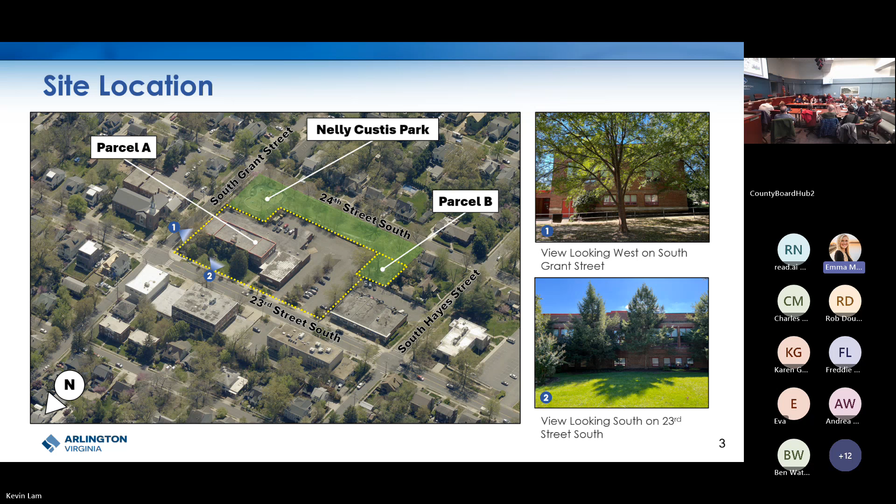It consists of two parcels. The first, parcel A, is currently occupied by Melwood, housed in the former Nelly Custis School building, as well as its associated surface parking area. Parcel B consists of a portion of Nelly Custis Park. Although the applicant owns parcel B, it has a public park and open space easement over it, and the applicant is not proposing any improvements to this parcel.

The applicant is requesting a rezoning to RA 8-18, multiple family dwelling district, for the entire site. They are also requesting a GLUP change to low-medium residential for parcel A only, while parcel B remains public GLUP designation.

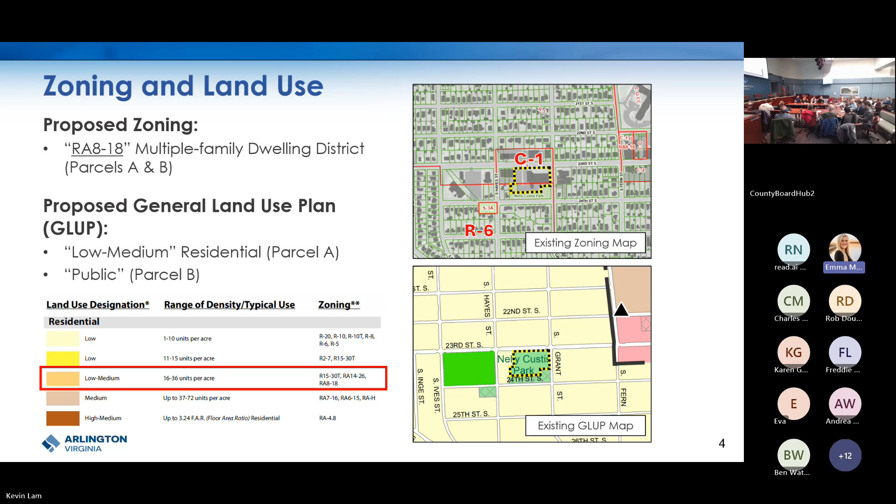In terms of policy guidance, we can again look to the Melwood GLUP study document, which provides specific guidance for redevelopment pursuant to various topics. Pertinent to tonight's discussion, topics will mainly focus on the transportation and environment recommendations.

Under transportation, recommendations include improving sidewalks and streetscapes to meet county standards, considering upgrading nearby crosswalks and bus stops, locating parking underground with parking and loading entrances appropriately screened, and conducting a multimodal traffic assessment to study potential traffic and parking impacts. In terms of the environment, encourage participation in the county's Green Building Incentive Program, prioritizing biophilia, sustainability, and meeting a tree canopy coverage goal of 25%.

To the extent possible, conserving existing mature trees, providing a vegetated green buffer with the park and adjacent properties, and finally employing best stormwater management practices.

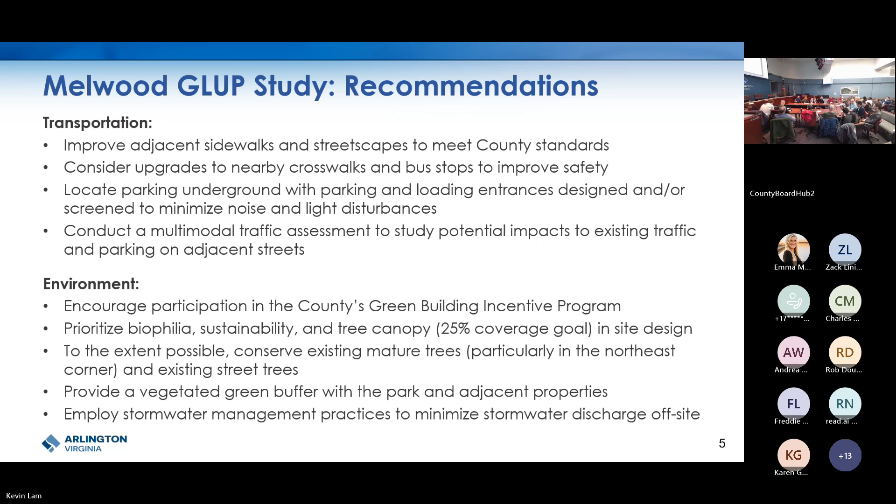With that in mind, launching into the topics for tonight, first up is project updates. I'll let the applicant go through these in more detail, but I wanted to highlight one main update: the main building entrance, shown by the red arrow, is now located where the historic interpretation of the school facade is. This also results in the ground floor uses being flipped, so the Melwood space is now on the western side of the ground floor.

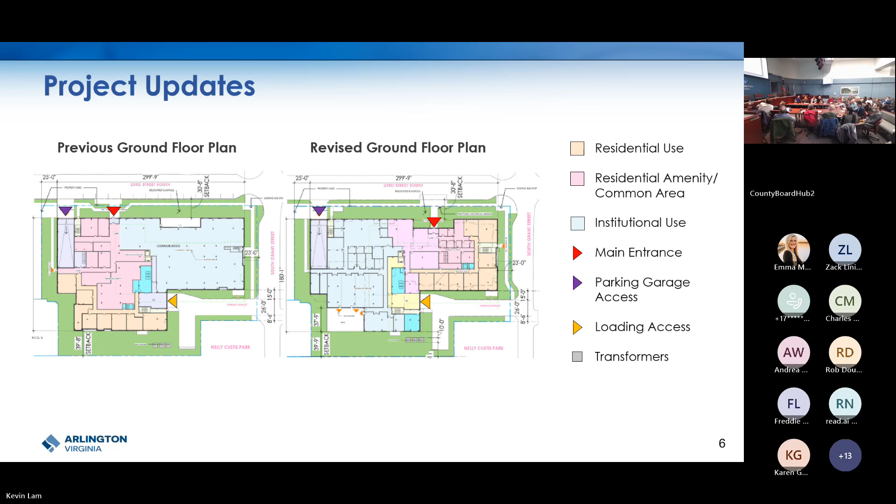All right, so Bryce, you can just hand me that. Oh, that works.

Again, my name is Bryce Johnson with the Department of Environmental Services. I'll cover the transportation section for this.

This location is served by a variety of transportation options, including bus stops spaced a block apart along 23rd Street South, nearby metro stations, and a bike share station on South Hayes Street to the west.

The MTP designates the adjacent segment of 23rd Street South as a Type E arterial road, planned to contain 2 to 4 travel lanes, no restrictions on driveway access, medium on-street parking priority, a 4 to 6 foot wide landscape strip, and a 5 to 6 foot wide sidewalk.

The MTP designates the adjacent segment of South Grant Street as a neighborhood local street, planned to contain either a yield street condition or 2 travel lanes, no restrictions on driveway access, a 2 to 4 foot wide landscape strip, and a 4 to 6 foot wide sidewalk.

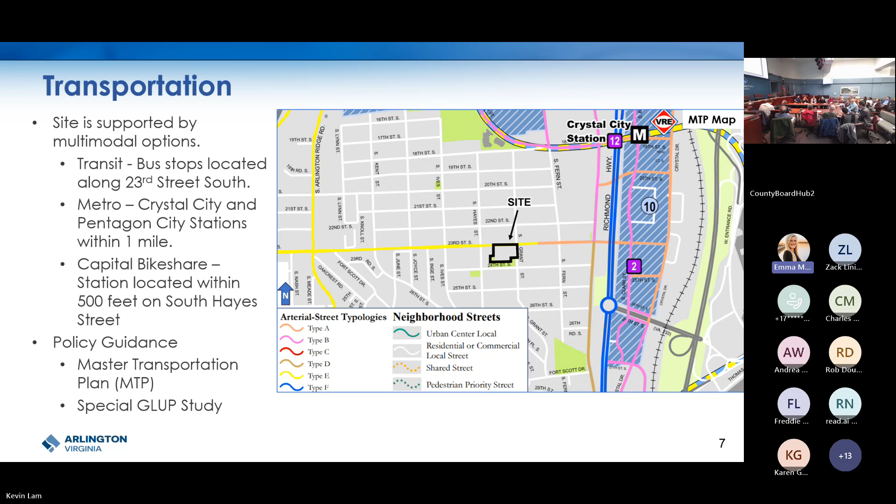Here are the proposed site conditions, showing again what Kevin was just showing, but this time focusing on site access. The applicant proposes to utilize an existing driveway entrance on 23rd Street South for the proposed underground garage entrance.

For loading and trash, the applicant proposes a separate entrance from South Grant Street, shown in orangish yellow on the screen. For bicycle parking, the applicant proposes 2 bicycle storage rooms, one located in the underground garage and one located on the ground floor with access from 23rd Street South.

Based on prior feedback from Metro regarding the 2025 Better Bus Network, the current plans show the removal of an existing Metro bus stop at the intersection of 23rd Street South and South Grant Street. However, the final approved bus network does show retention of that bus stop, so staff is coordinating with Metro and the applicant to ensure the plans are consistent with the new bus network launching in summer 2025.

If the bus stop were to be removed, the site would retain access to nearby bus stops located within a 3-minute walk to the east and west.

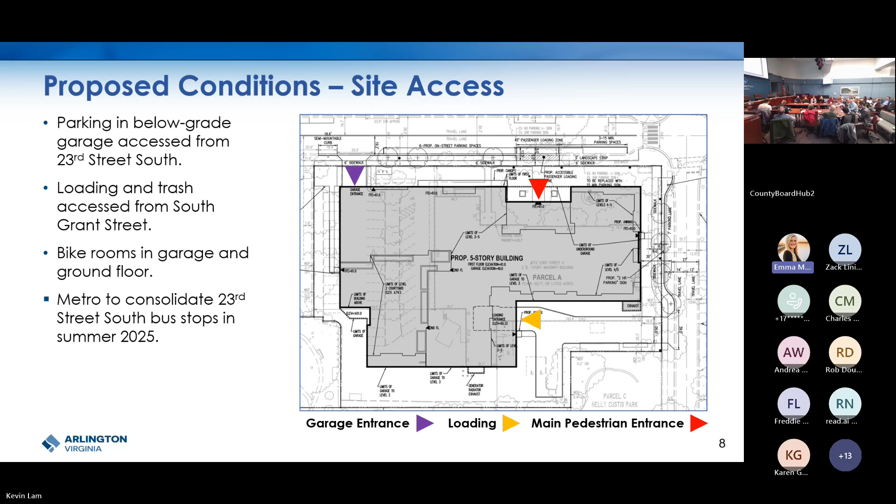Here we'll move on to parking and loading. The applicant proposes a total of 93 parking spaces with the submission submitted earlier this month. This includes 73 residential parking spaces and 20 parking spaces for Melwood. The applicant is requesting a reduced residential parking ratio of about 0.69 spaces per unit.

The parking spaces are all located in the below grade parking level at the garage, accessed from 23rd Street South, as mentioned before. The building includes a single loading space accessed from South Grant Street, which will serve both residents and Melwood. The applicant also proposes a total of 53 bicycle spaces, including the 47 secure spaces mentioned before, as well as 6 street spaces located outside.

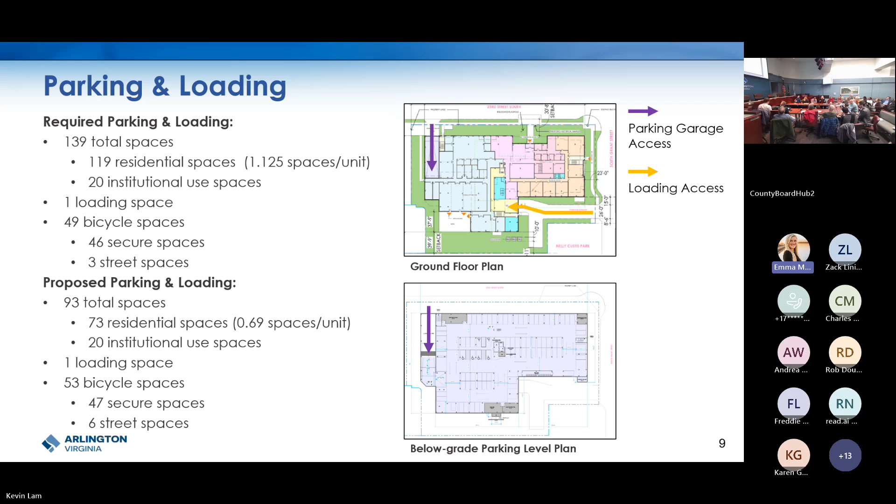On the street, the applicant proposes 3 additional parking spaces, a passenger loading zone, and 3 short-term parking spaces. The passenger loading zone would be located at the main building entrance, as Kevin mentioned before, with the short-term parking located to the right or east of that entrance.

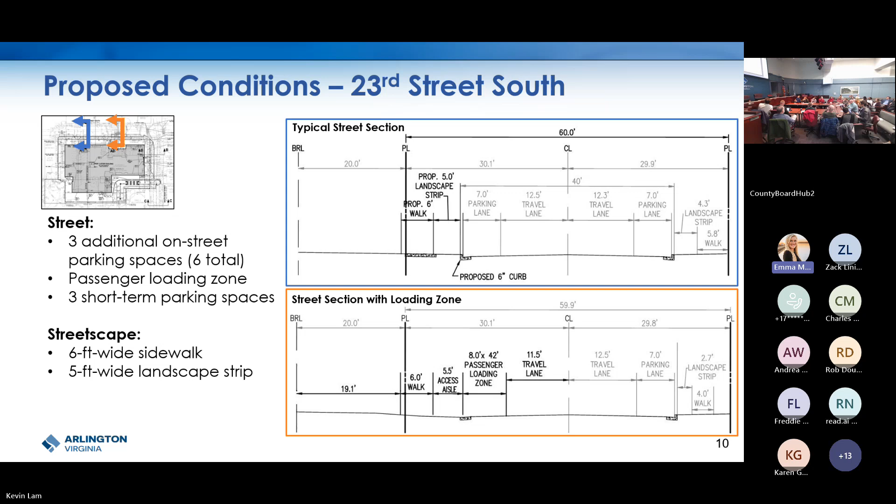Next, we'll move on to South Grant Street. This is again, in this instance, facing north. The applicant proposes to widen the majority of the site's frontage with South Grant Street in order to accommodate a required aerial access fire lane within the travelway.

This is a minimum 26 feet. This new street section will increase from being 24 feet wide total to 34 feet wide in total, including 2 travel lanes instead of a yield street condition, and remove the Sunday-only parking currently provided. On-street parking will, however, be provided along the property's frontage with a curb inset created by the street widening.

Moving on to open space and landscaping. Along the 23rd Street frontage, the applicant proposes new trees and landscaping within the building setback. The applicant also proposes a vegetated buffer with Nelly Custis Park to the south. Overall, around 47 trees are proposed to be removed and replaced per the county's tree replacement standards.

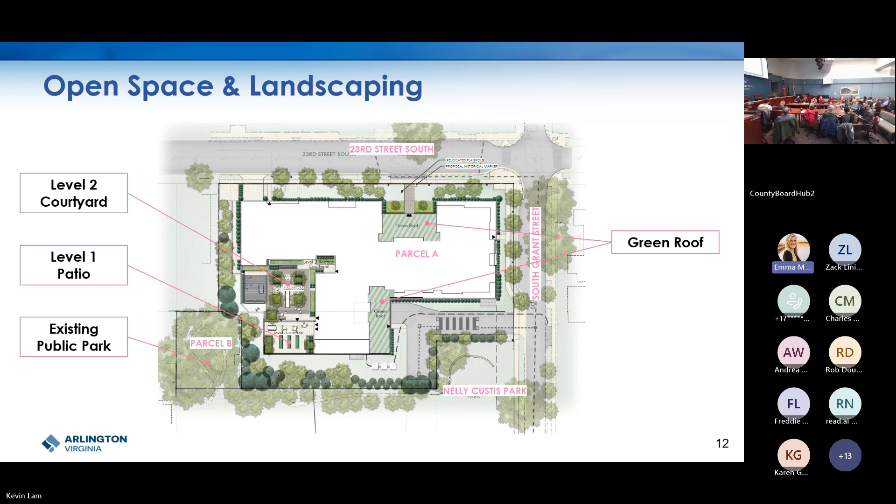There will be 63 new trees planted on parcel A for a tree canopy coverage of around 22% just on parcel A. There are also 8 trees being conserved on parcel B, which remains as part of Nelly Custis Park, and would bring the total tree canopy coverage for parcel A plus B to around 27%.

The applicant proposes to achieve a National Green Building Standard Silver certification, which is an eligible green building rating system per the state's affordable housing funding applications. This is in lieu of the LEED or EarthCraft multifamily rating systems we typically review at the county. While the applicant is not currently seeking additional density under the county's Green Building Incentive Program, they are pursuing additional certifications such as those listed here. Lastly, the project will be providing Energy Star appliances and WaterSense fixtures.

In terms of community engagement, staff held an online engagement opportunity, which garnered 219 participants and over 1,100 comments. In terms of tonight's SPRC discussion topics, the feedback was that many feel the proposal will significantly impact traffic and on-street parking availability on surrounding streets.

While some believe the amount of parking being provided is appropriate, given the proposed use and nearby transit options, many feel it is insufficient. Many also expressed strong dissatisfaction about the removal of existing trees and green space, especially in that northeast corner. And while some support the pursuit of NGBS Silver certification, others advocate for higher green building standards such as LEED Gold or higher.

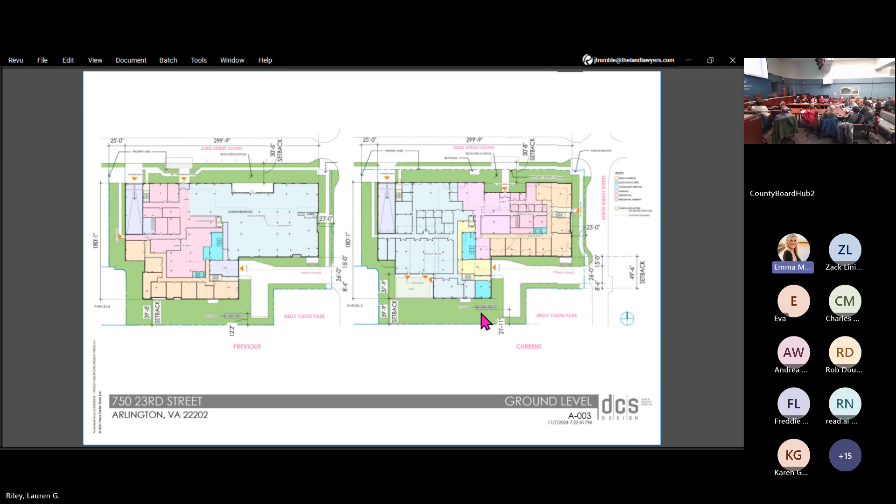The other thing you can see on this page is the prior location of those transformers, about 12 feet from the property line, are now almost 22 feet from the property line. We moved them as far back as we could while maintaining the requirements for distance from the building.

And then on the next page, this is a better exhibit to show you how that second floor has pushed back. It is pushed back an additional 37 feet 9 inches from the building front where it stood before. That provides additional relief in the massing, and additional relief in that courtyard not looking over the park directly. As I showed you on the previous page, we've added landscaping there.

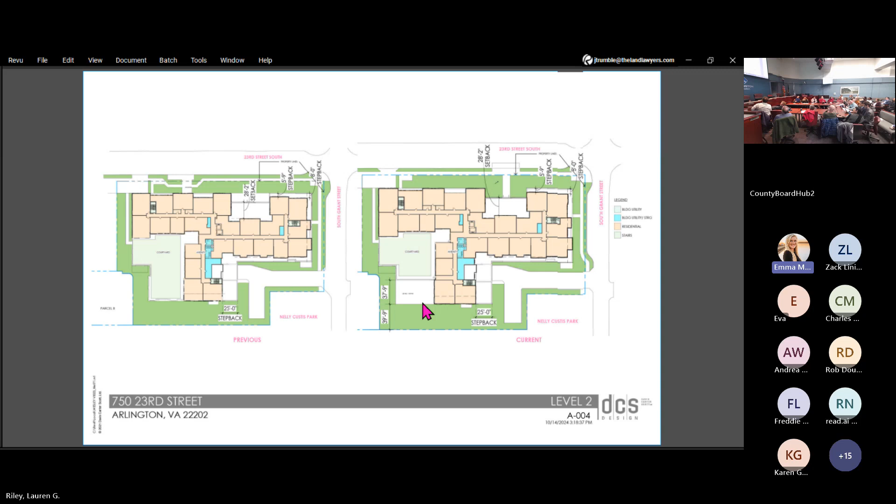I'm going to quickly turn it to Karen, who's going to talk about the streetscape.

The next slide, here is Grant Street. Again, what was discussed earlier today, it is a 17-foot wide yield street. Due to the fire marshal requirements, we are increasing that to 26 feet wide with a 7-foot parking lane now on the west side of the street.

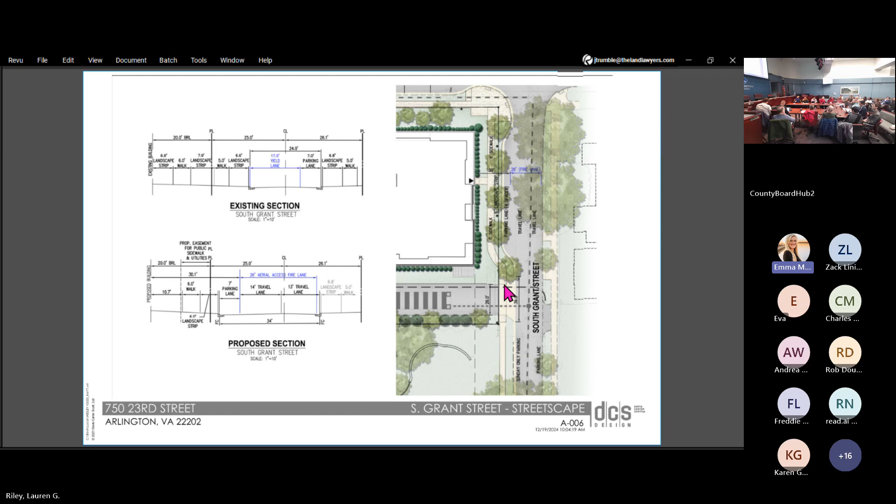Another comment we addressed was on the previous design, the transition to the existing curb was south of our driveway entrance along Grant, and now the bump-in is only between the corner and our entrance, then we shift back to meet existing, so there are no changes in front of the park along the street frontage.

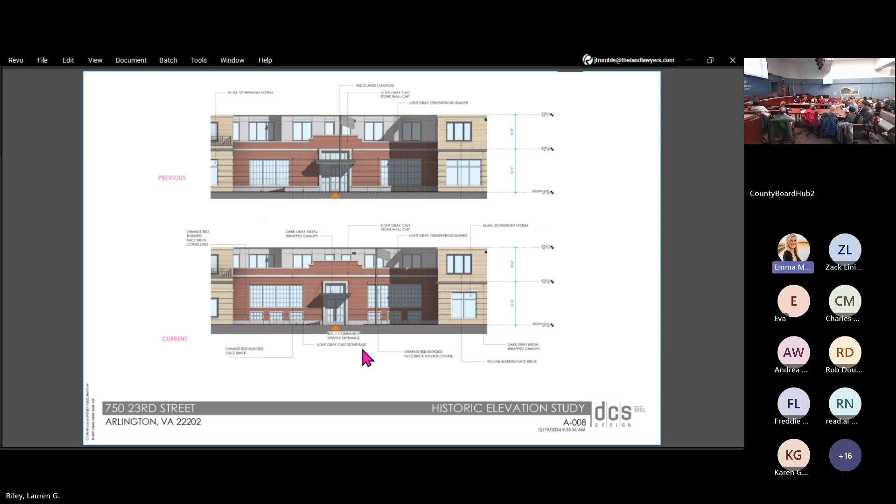As we go to the next slide, the historic evocation - you can see at the top is the previous design, and at the bottom, really a story and a half tall now. We've raised the wall height, and we have echoed the original Nellie Custis entrance with an echo of the Nellie Custis canopy over the door. You'll see in a second that we've picked up the details from that, and the fenestration there is very evocative of the original architecture of the Nellie Custis School.

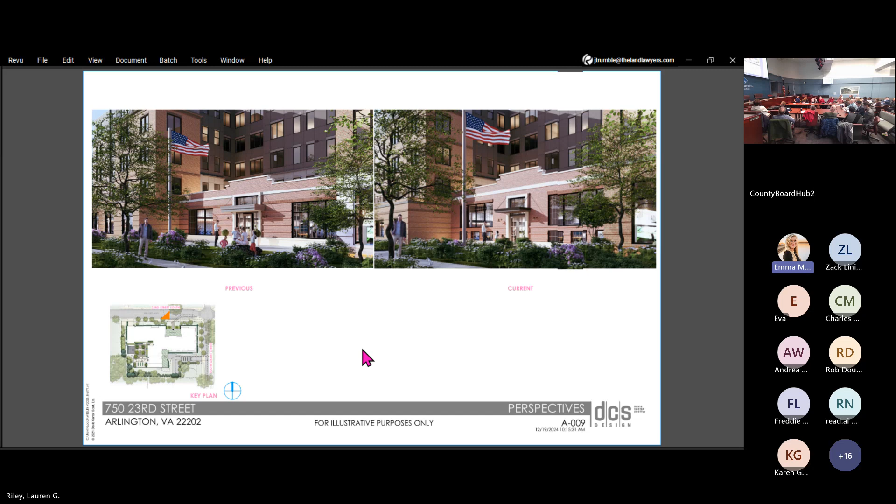So a little better perspective, I think, with these photoreal perspectives. You can see on the left, the previous, on the right, the new proposed, and you can see the windows - we've created that 1.5-story look of the Nellie Custis School.

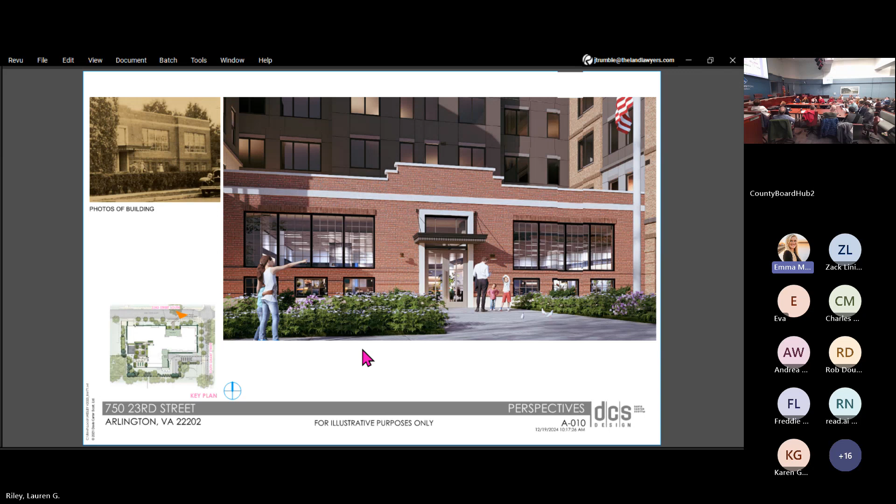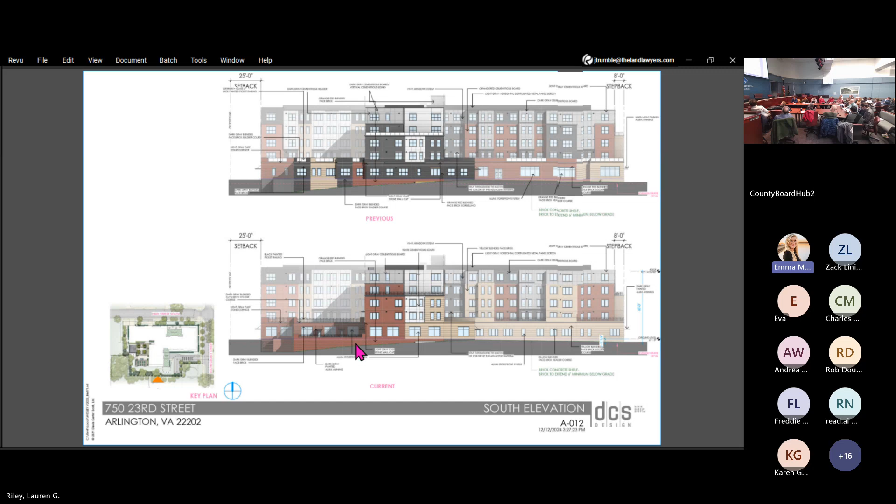Now around to the south elevation. Again, you see the change to the residential windows on the bottom. I think the significant element here is to the west - you see, quite dramatically, the drop in the patio that we now have created in front of what is the Melwood space. You see the Melwood office windows at the back of that 1-story patio.

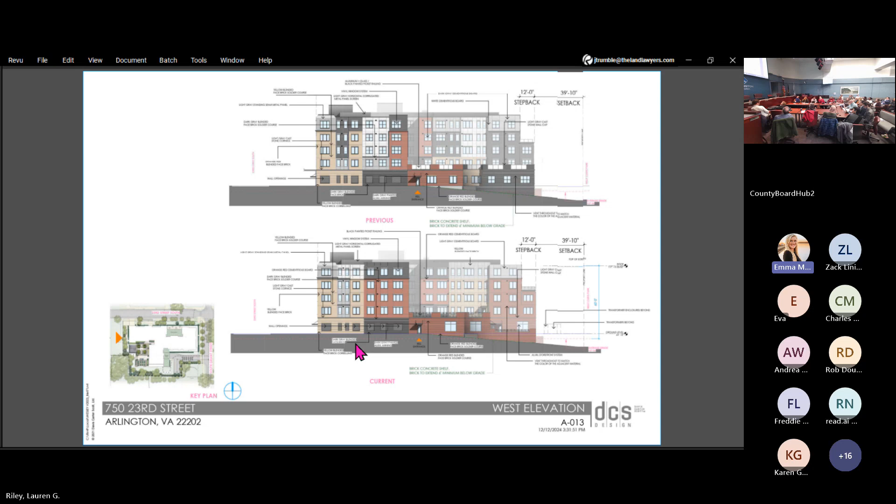Going around to the west is really probably the least changed, but we've actually simplified the roofscape and simplified the color scheme somewhat. You can see on this west elevation that one-story drop to the patio.

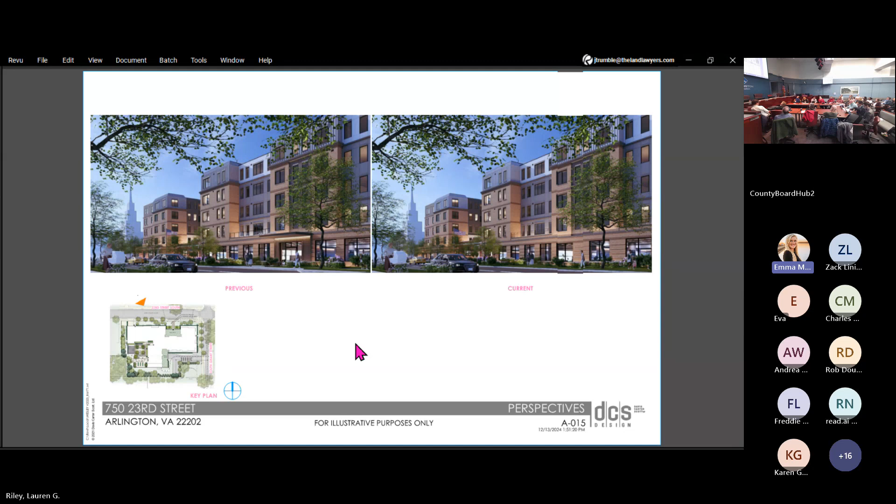Just to look quickly around the building, you'll see perspectives. These you have seen before, and you can see the difference, I think, there with the increase in height of the historic evocation of Nellie Custis.

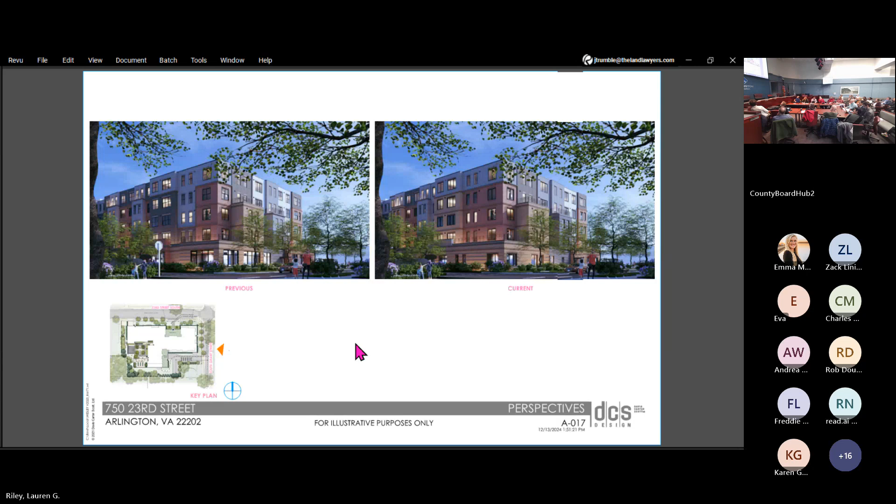Moving around to Grant Street, just keeping rolling here, I think we can move on quickly around down to Grant Street and then around the south, looking across the Nelly Custis Park. One last perspective really shows how that quite dramatic drop in the patio is, so that we have much less of an imposition on the Nelly Custis Park.

And so over to Felice for some transportation. Thanks, Doug. I think we've covered a lot of the transportation elements already, but I'll run through these quickly - just wanted to give a transportation overview of the site.

As Bryce mentioned, it's within about 0.6 to 0.8 miles of 2 metro stations. There are on-street bicycle routes along 23rd and South Fern, bike lanes along Eads Street in the vicinity, several bus stops in the area, and as Bryce mentioned, the area is undergoing a Better Bus Network initiative, which is looking to consolidate some of the bus stops in the area.

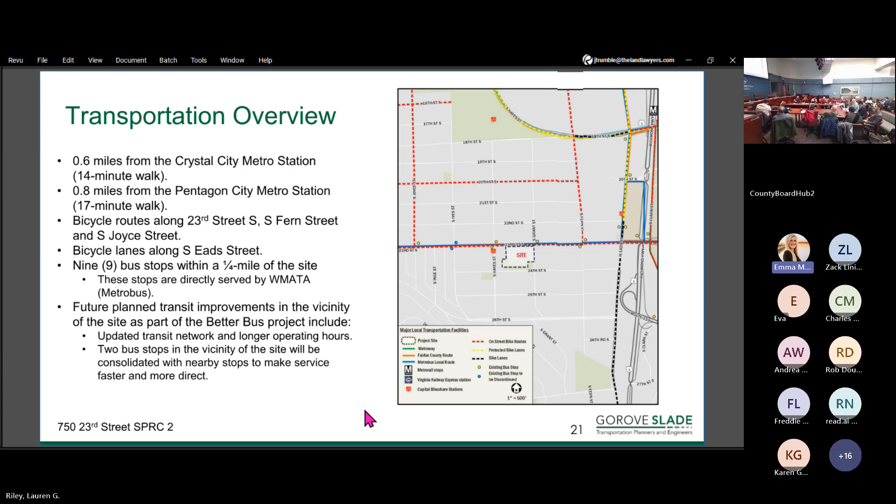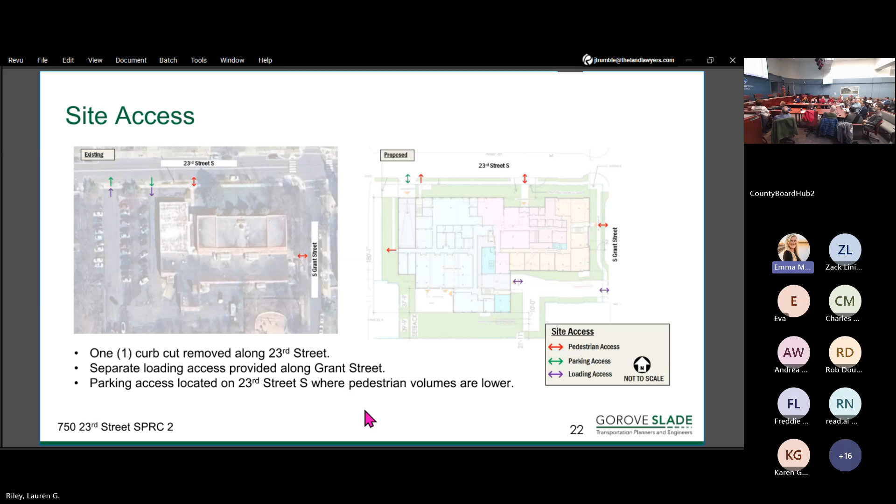Again, site access is shown here. I just wanted to highlight that one curb cut is being removed along 23rd Street. Separate loading access is over along Grant Street, and then parking access will remain on 23rd Street, where the pedestrian volumes are lower than Grant Street.

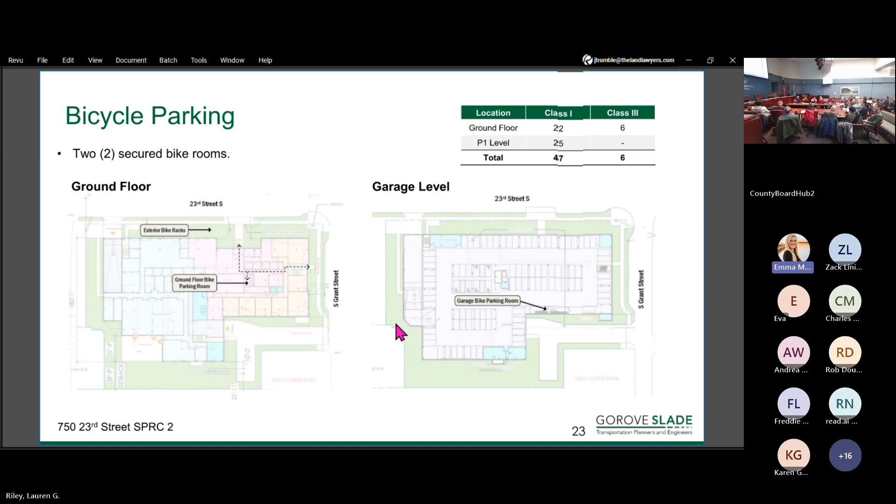Again, this just shows the bicycle parking. At the ground floor, the exterior bike racks have been moved closer to the entrance, and there's a ground floor bike room. You can access that room from both 23rd and Grant Street. And then in the garage, there's an additional bike room that you access via the parking ramp.

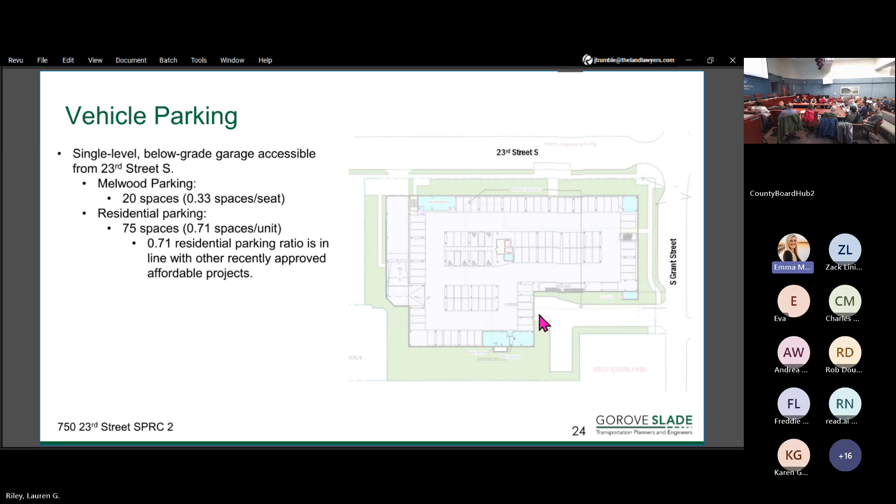For vehicular parking, we've got one level of below-grade parking with 20 spaces provided for Melwood. The plans have been evolving a bit, so we actually have 75 spaces now for the residential, which brings the ratio to 0.71 spaces per unit. We find that's in line with other residential parking ratios for comparable affordable projects.

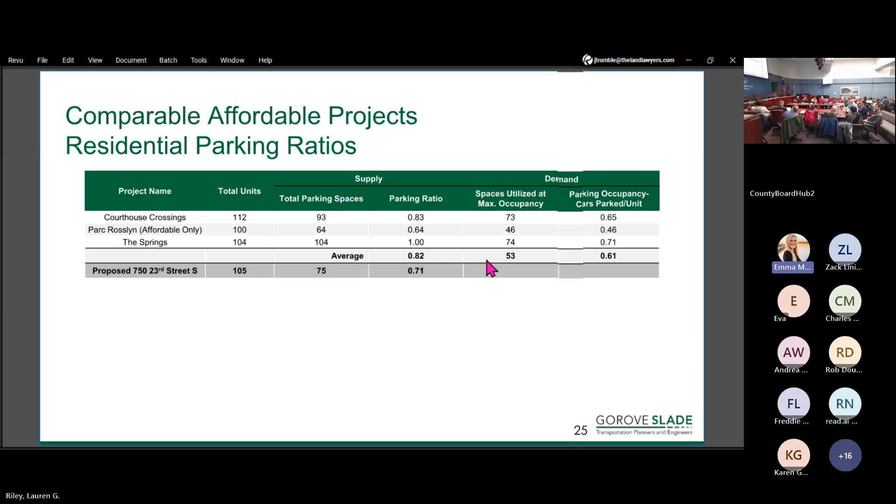Some of those are shown here. There's a column in the middle that shows the supply from some of those sites at 0.82, but really what we're focused on is the demand ratio that shows parking occupancy at 0.61, which is comparable to our 0.71.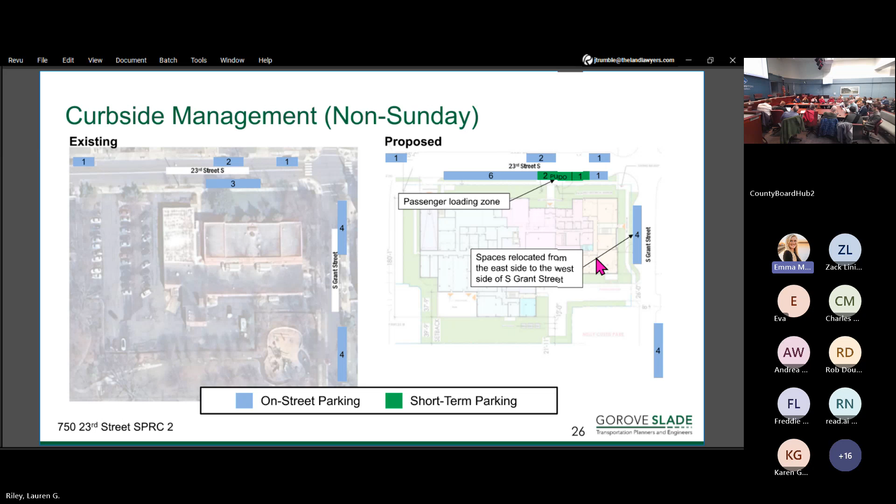This just shows the curbside management, so the on-street parking on both 23rd and Grant, existing on the left and proposed on the right. We've touched on this, but it does show the 4 spaces on Grant Street moving from the east side of Grant over to the west side.

On Sunday, as we've discussed, there is currently on-street parking on the west side of Grant that's being removed in some sections. The 4 spaces have been moved over to that side to provide that wider section of Grant for fire access.

And then finally, the site will, of course, comply with the transportation management plan elements that are typical for a site, including participation in funding, coordination with ACCS and ATP membership, and the typical elements of the TMP plan.

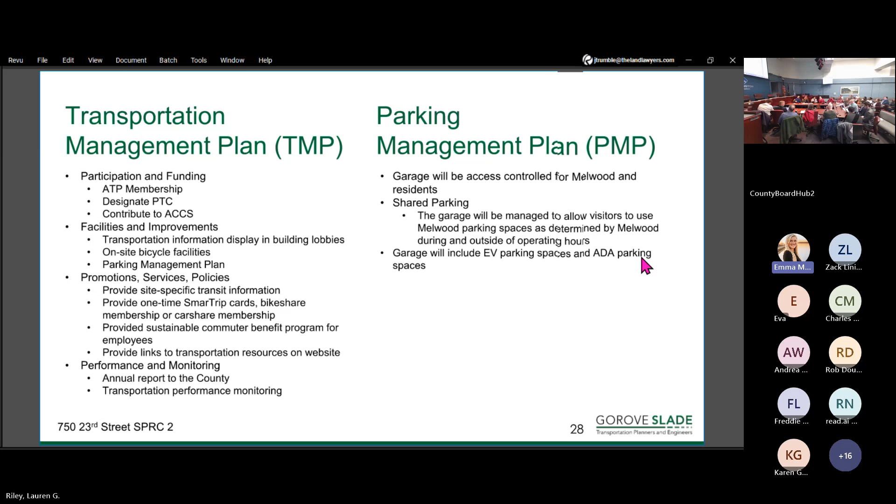For the parking management plan, the garage will be access controlled for Melwood and for the residents. There will be some shared parking. The garage will be managed to allow visitors to use the Melwood parking spaces as determined by Melwood, depending on their operating hours. And of course, the garage will include EV and ADA parking spaces.

I'll turn it to Kathy.

Finally, to touch on sustainability, as was mentioned, we're not utilizing the county's Green Building Incentive Program, as all of our bonus density is being earned by our proposed affordable housing building. That being said, we are committing to the National Green Building Standard Silver certification, which is equivalent to LEED Gold.

We are pursuing Zero Energy Ready Home certification. It makes the project more competitive and we hope to achieve it, but I have to put a little caveat that it's contingent on being awarded certain financing to pay for that, but it is our goal. Our key sustainability measures include an all-electric building, an energy score of 75, WaterSense features and Energy Star appliances.

Fresh air ventilation and EPA Indoor Air Plus certification, high performance windows and insulation, and a minimum of 4% EV parking, although we hope that will be higher too.

I did want to touch on the tree canopy. First, I wanted to say, if you looked at these plans online, they have been evolving. There have been tweaks. We noticed we had different images pointing to the wrong things, we had the bike racks in the wrong location. So we've made some updates to this presentation and provided that to staff, and they'll put that up online. So if you see something that looks a bit different than what you saw last week, it's because we've been working feverishly to make sure it's accurate.

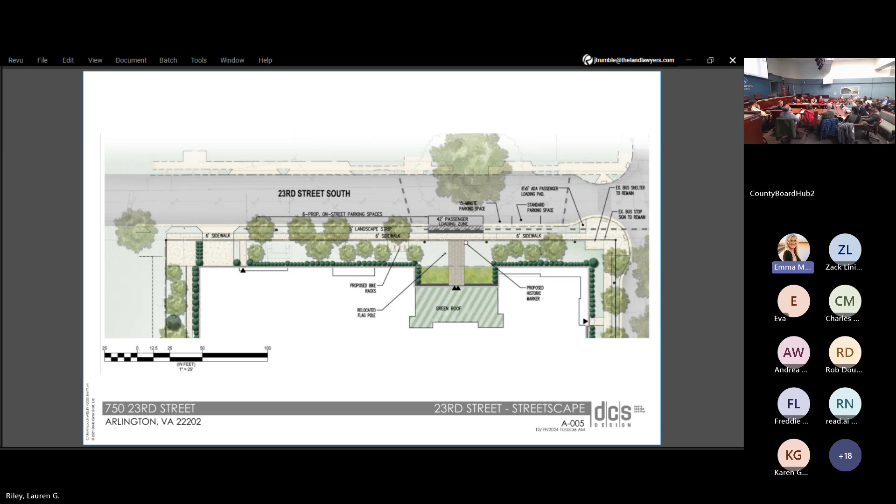Hi, Stacy Meyer from Aurora Highlands. As far as the updates, we went through it extensively, and some residents and the zoning committee went through the November presentation. Unfortunately, the one that just dropped was only a day or two ago, it's been a very fast week, and we really haven't had a chance to look through it. I will say that the scope of the changes we were expecting and would like to see are nowhere near what we're seeing in this presentation.

We sent a letter to the SPRC yesterday afternoon, and to the ones listed online, and to the Planning Commission, with our comments and extensive recommendations for changes that would make this project appropriate, including protecting the park, providing adequate parking ratios, providing adequate parking on street and for the ambulance that comes to the urgent care next door, and including the precedent of height, which is completely out of proportion. All these things we've been talking about that we have problems with this project, none of it really has been addressed.

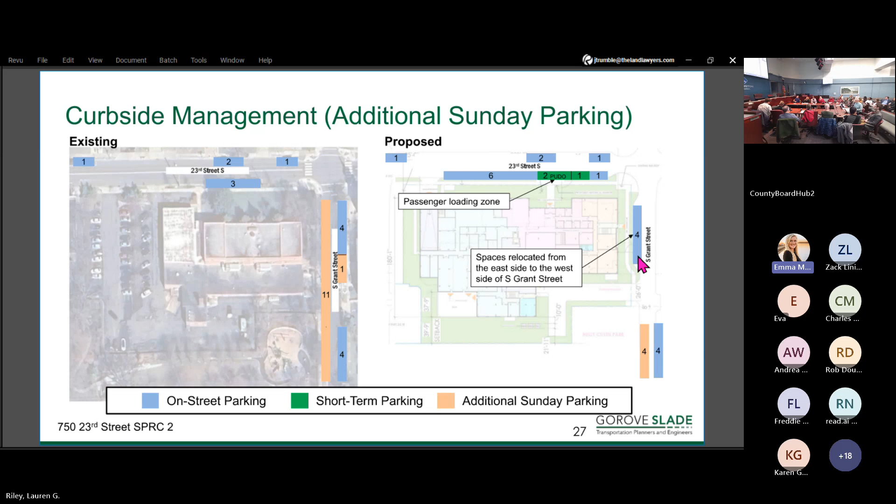We're joined by Commissioner Doris Ray from the Disability Advisory Committee. Doris, right now we're asking for any questions or comments we may have about the updates from Melwood.

Thank you, Mr. Chair. I had a few questions. One is, there is both vehicle access and a front entrance used by both the residents and the workers and other persons coming to the Melwood work site. Is that correct? Yes, there will be a main entrance that will serve residents, Melwood, and any visitors and employees.

So you're mentioning that deliveries would be done in the drop off and pickup zone, right? Correct. I would ask you to consider how and what priority that area will be given to individual residents, as well as people working at Melwood who are arriving to be dropped off and picked up by a paratransit vehicle, in other words either Metro Access or Star. And how are you going to maintain clearance so the vehicles can get in and out as they need to, keeping Metro Access schedules, while there are trucks sitting there making deliveries?

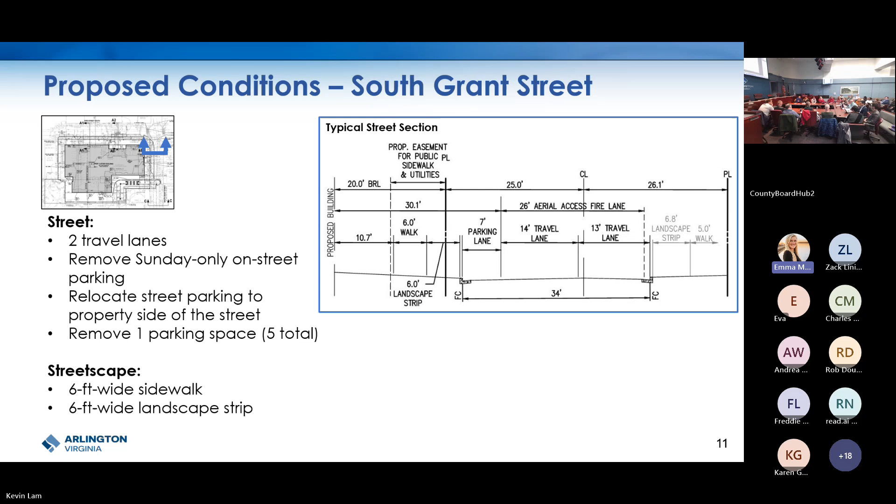And, you know, the last time we were here, we thought it was going away. And then we saw at the end of November, there was an update and it's staying. And so we are working with staff to try and figure out what happened. And if it in fact is intended to stay, those are the improvements that will be provided.

And my real concern is, my reading of the Better Bus Network is only one bus route is going to remain on 23rd. That the two 23 buses are not going to go down 23rd. One is going to turn from Glebe onto Mount Vernon Avenue, and the other is going to continue down Glebe, and the one that stays on Glebe, which is the equivalent of 10A, basically goes from the Pentagon to Huntington.

So you have nothing coming from the west. And either I hope that Arlington County can come up with some ART buses or something can be done. I find it unbelievable that we will be left with just the one bus. And I use those buses, so I care very deeply. Thank you.

No questions. Commissioner Peterson.

Steve. So I just wanted to align myself with Doris's comments earlier about making sure that residents and Melwood guests somehow are prioritized in the pickup drop-off area. I'm not sure if there's space for like an Amazon truck and a STAR vehicle, but just making sure that guests with different abilities are able to get in and out to enter the building without having to wait an undue amount of time. I also, Doris started talking about some of the parking needs downstairs, making sure that the spaces might need to be wider.

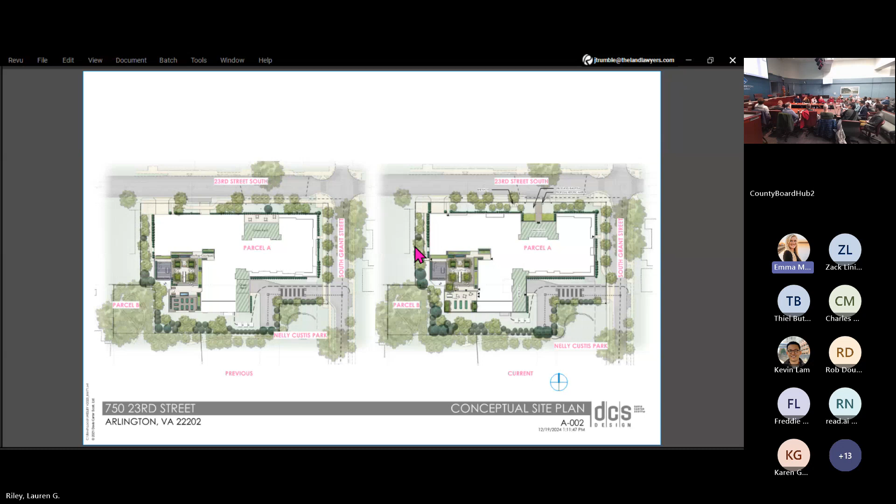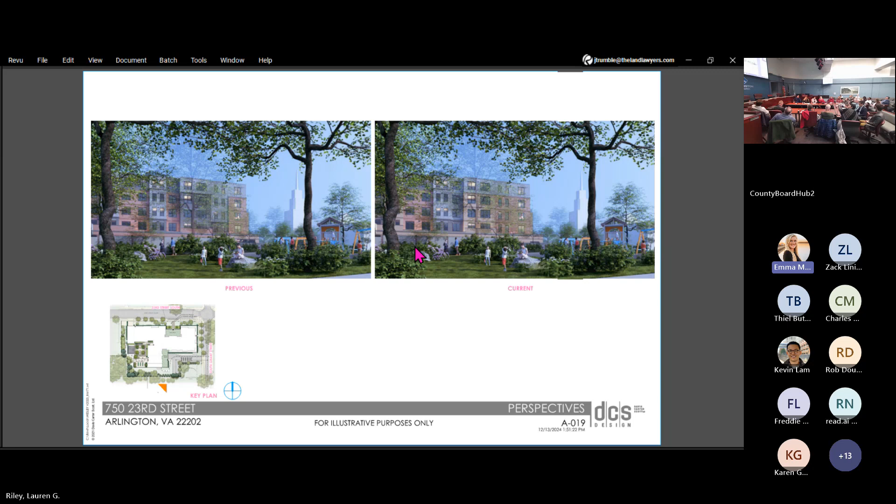The slide, if we can pull that up, that showed not the overview but the view from the park looking at different angles - in some of the places there was more fence than greenery. I think it's the next slide, maybe a few more over. Yeah, okay, around, maybe go forward one or back one. Yeah, okay, somewhere around here. One of the slides I can get closer on, it looked like there was a lot of fence. So I don't know if there's a way - when I Google green fences, you get these things that have ivy climbing on them, or they've actually built the fence to support things, or taller bushes along the whole perimeter.

So that's what I was thinking when we were in LRPC, when we said there would be a green buffer - the whole fence would feel like you were potentially looking into a forest instead of a couple of trees and bushes that are only so high, and then you can still see a giant fence there. So if there's more opportunity to really make the park feel like it's in the middle of a green forest, that would be great.

Can I ask a question on that though? Because this is a view from 24th towards the building. Our landscaping is on our property. The fence is on the park property. So when you say buffer - the fence - are you asking us to plant trees in the park? I'm just trying to understand your comment.

Maybe from staff's perspective, when you were thinking green buffer, when that was discussed during the LRPC process, how were you envisioning that to mitigate the views from the park - kind of minimizing the visual impact from the park. So the green buffer could be like vegetated screening in the form of trees. Obviously it could also involve how far the building is set back from the park. But a lot of that strategy in terms of minimizing the visual impact would come from that vegetated buffer.

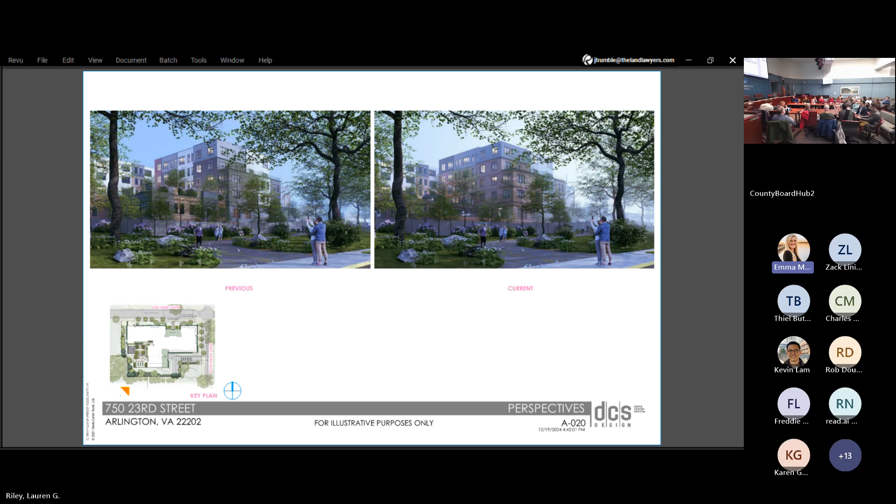Okay, yeah, if there's any more that we can do, I think that would be appreciated. And if you could coordinate with staff to do more with the fence, if that's allowed, I think that would be a really nice benefit.

Finally, native species - we always like to push that as much as you can do that there. And the bird-friendly glass, since you do have the rooftop green area, birds may be more likely to be flying in that area. We do have the park right next door, and nobody likes to see a bunch of dead birds along the perimeter of the building. And that is not nice for the people who live in the building or the kids playing nearby. So thank you.

I guess three topics for me. With respect to the tree canopy, I applaud your increase in the tree canopy. The staff cited 22% coverage. You're saying 23%, but we think that you can get to 25% as recommended by the LRPC report, either with the addition of street trees or the less preferable rooftop trees. We think there are opportunities to increase that by 2%.

The LRPC report, as I read it, recommended on-site coverage of 25%, and we think you're still short of that. We would like to see that remaining 2% or whatever closed. The second comment is the LRPC report was also pretty upfront in recommending preservation or conservation of mature trees in the northeast corner as possible. So what is the applicant's position on that?